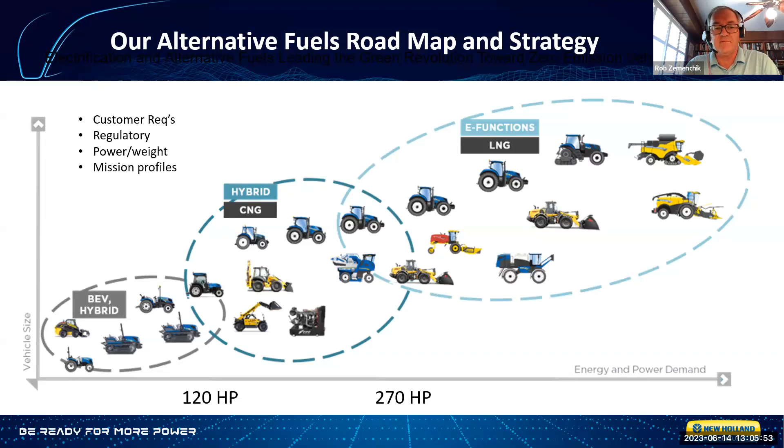With that background, we took a look at some of the different opportunities for energy out there. What you find is, all the way from diesel on the left, as you go across the different sizes and groups of available solutions, they seem to get bigger and bigger and take up more space. On the far end, batteries for a high horsepower vehicle begin to exceed the dimensions of the tractors themselves, or would overly dominate them, to where it becomes impractical from a visibility, safety, or other standpoint.

So ethanol and methane solutions kind of reside in the middle and give us an opportunity to deliver an energy source on board the vehicle without overwhelming the design and function and use of the vehicle from an operator standpoint. Okay, so there you see the methane that we're talking about today. And then you have hydrogen, and we looked at that concept previously. We had a hydrogen concept tractor as early as 2011, but it's so big and cumbersome for the profile that we want to fit with the tractor in question today, and then the battery piece.

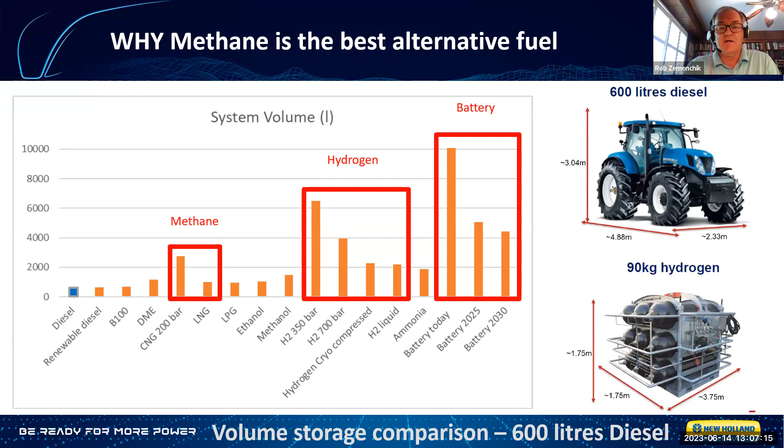Okay, so just to fast forward a little bit and a glimpse as to what we're going to be talking about today, we've introduced the T6 methane compressed natural gas tractor, primarily in Europe first. This tractor is about 180 horsepower, and you see a few tanks and other features that are added to the tractor to contain the methane, and I'll show you schematic diagrams of that later in the deck.

And then we have the T7, which is our LNG tractor. Now, in the past, we would create a concept tractor and talk about it publicly, but I'm excited to say we've gone beyond that already now. We have triple-digit volumes of the T6 tractor now in customers' hands on farms in production. They can buy one from their dealer and go ahead and take that home and use it just like a normal tractor. So we're in the production phase now of this.

We have been shipping these tractors since last year, and they're connected. We get the data from them. We see them on the telematics and can monitor the CAN parameters just like a normal tractor. And then the LNG tractor, though, we're still in the, you might say, late concept phase. So we've got some out on trial at the farms, and we're nearing the time when we would make those commercially available. So the T6 is ready to go and up and out there. T7 on deck.

Let's see here. All right, and then just as a glimpse on related products, we have the fully electric vehicles. Now they're a little smaller for the reasons I stated. You don't engage the ground as much with these type of tractors. They're more orchard, vineyard, or specialty applications, mowing, other light loader work. And so we showed this at Las Vegas earlier this year, and it is a tractor that we have planned to commercially release soon as well, but it is fully electric down in that lower horsepower segment.

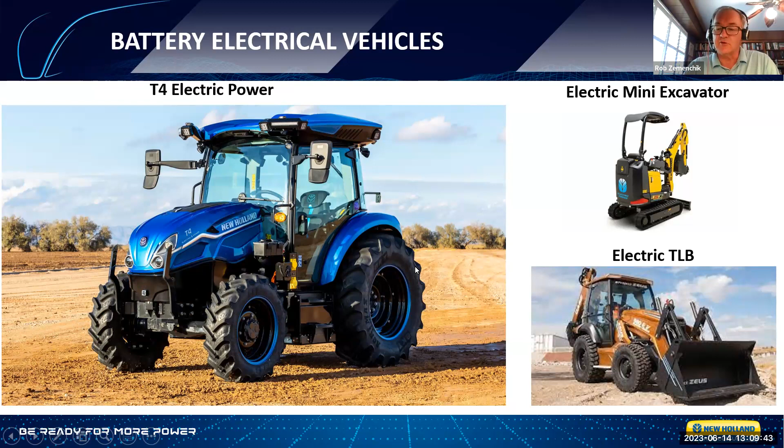And on the construction side, this is also early days of what we're introducing from fully battery powered electric vehicles with CE in mind. So just to round out the alternative propulsion look and feel from the New Holland brand.

You see the rationales then for why we would want to do these kinds of things. We want to reduce our carbon footprint. This plays into the SBTI decarbonization efforts that you may have heard a lot about. So this fits partially into scope 3, our use of sold goods, as well as an avoided emissions category, which is a little bit beyond scope 3, but is now being formalized to where companies would get the decarbonization credit outside of SBTI, but within the avoided emissions category.

So the methane tractor does a bit of both. It will actually generate less emissions, which is scope 3, and then from the ability to capture and contain the fugitive methane at the slurry, you could start to generate some avoided emissions credits as well. So for those in the sustainability camp, this is a little bit how we perceive it. And then, of course, the improved air quality measures, which I will detail here momentarily.

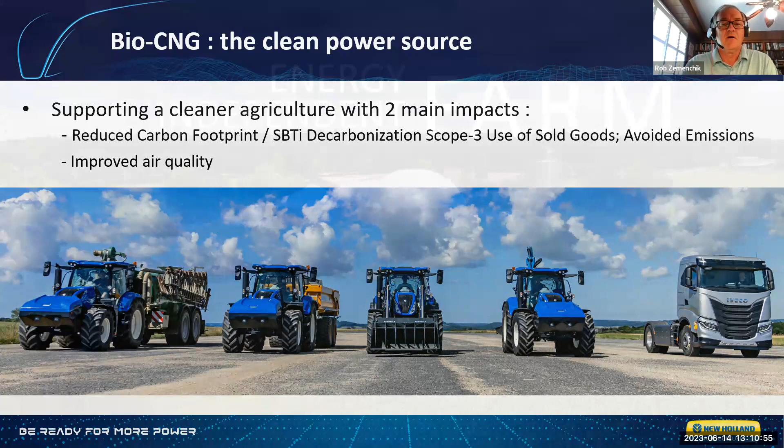Okay, let's look at an energy independent on-farm experience, if you will, and some of the KPIs and metrics that we've learned as we've deployed these tractors. All right, so a flow chart of the schematics involved sort of tell us that you can take all of these organic inputs, mainly manure, but it could be crop waste, food waste, any organic source can be pooled into this digester represented by the blue disc there in the middle. And it's anaerobically digested, okay?

And the flows coming out are quite interesting. There's opportunity for energy cogeneration. And then as the methane is contained, you have to upgrade it or filter it, if you will. The raw gas is about 60% methane, but there's a lot of hydrogen sulfide and water vapor and other things you have to take out before you have automotive grade methane that can be burned in an ICE or internal combustion engine. And so that's what the process requires.

After you upgrade and filter the gas, you have to compress it down to have enough range inside the tractor to make it practical. You can't run out of fuel in 20 minutes - a farmer would not accept that when he can go a whole day on a tank of diesel fuel. So we have to think about first upgrading it and then compressing it.

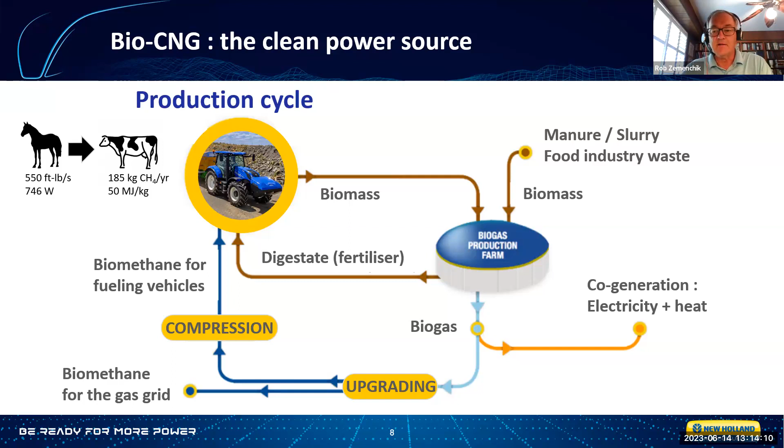About 80 times more potent even than CO2. So this is a double win - we get to take a waste product that is harmful for the environment and turn it into an energy source.

Bennamann is a partner that's helping us get there from here. They're a UK-based company, a startup with about 40 employees. Long story short, they wanted to solve the problem of the barriers to entry into this, and so they've developed a lagoon system that's affordable and practical and scalable. We have taken an investment position in them to help them along the way.

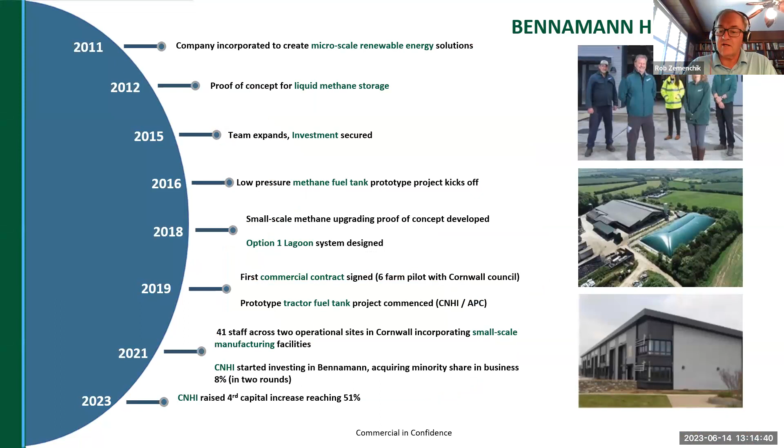It accounts for a huge portion of the gases that agriculture generates that contribute to global climate change. Some estimates are in excess of 30%. So we need to solve this problem if we're going to continue to use the confinement systems and energy-rich production systems we've grown accustomed to. Time is of the essence - the 2030 deadline was put on and agreed to by many countries in the Paris Climate Accord. So we're working under that paradigm to solve this problem sooner than later.

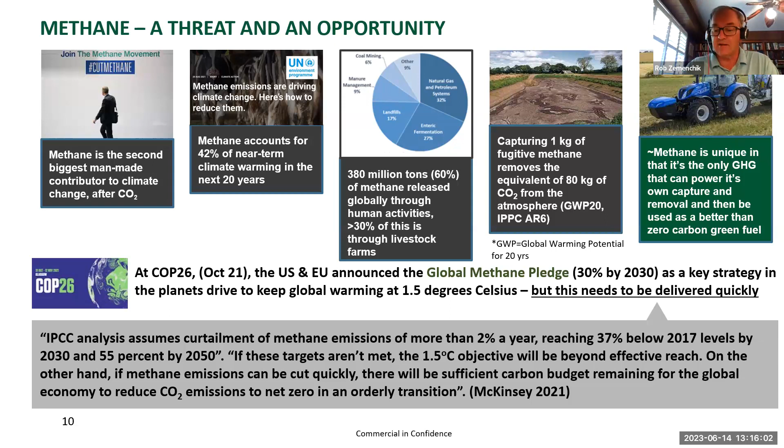It can be rapidly refined and liquefied. What we have seen is about every 5 days or so, the raw methane capacity of the system is full, then we convert it and generate the automotive grade methane.

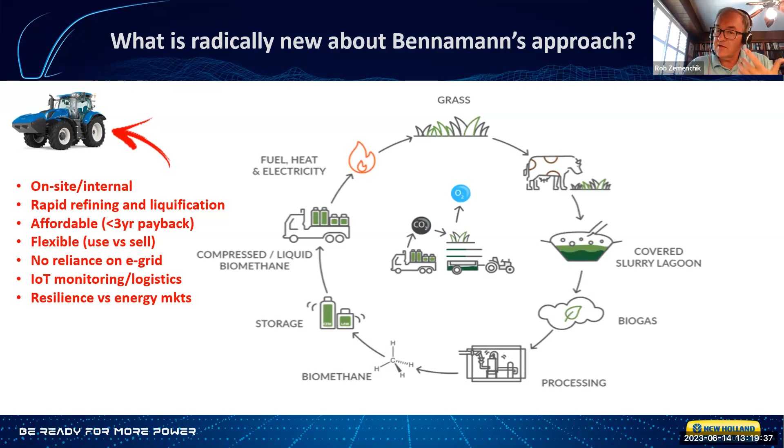You don't have to be on the grid and draw power from Commonwealth Edison or anybody else to make it work. This is another benefit of this circular system, not being dependent on the grid. You can hook it all up and monitor it 24/7, 365 with typical apps and connectivity. This helps the farmer and even the local community be resilient to extreme fluctuations in energy prices, which we saw in the last two years, particularly in Europe and Eastern Europe due to the conflict in Ukraine. So there's a lot of pluses here to take a hard look at this.

Okay, so here's what they do. You have a lagoon, usually 10 meters square or 5 meters square, something along that order. A plastic tarp is put over it, and this collects the dirty biogas as it's anaerobically emitted from the slurry, captured in the first layer.

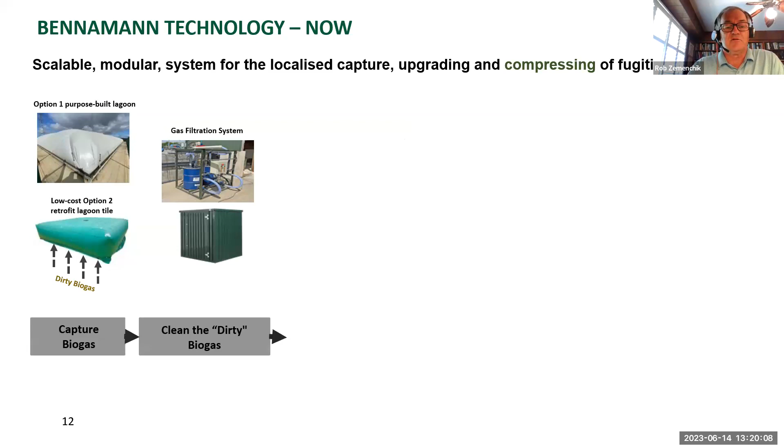Then there is this gas filtration system on the side, where you take out the impurities I mentioned, the so-called dirty biogas. Then it is stored in an upper layer of the same canopy. This green tent is sort of two layers: first layer is dirty, second layer is a storage tank, a fabric tank, where the clean gas is stored. It's like a sandwich you're building, dirty, then clean.

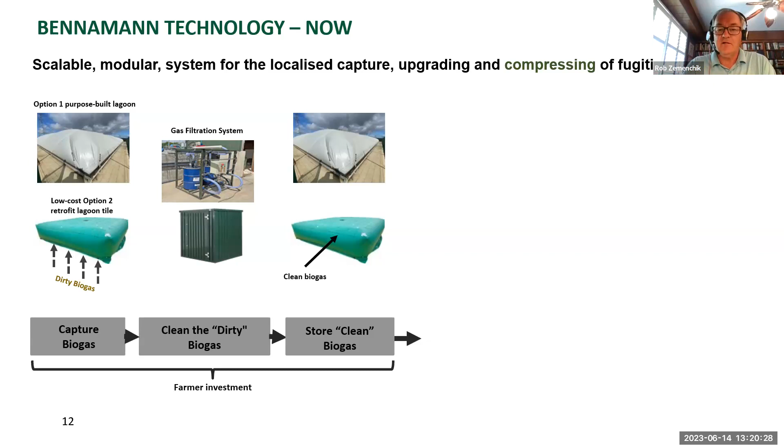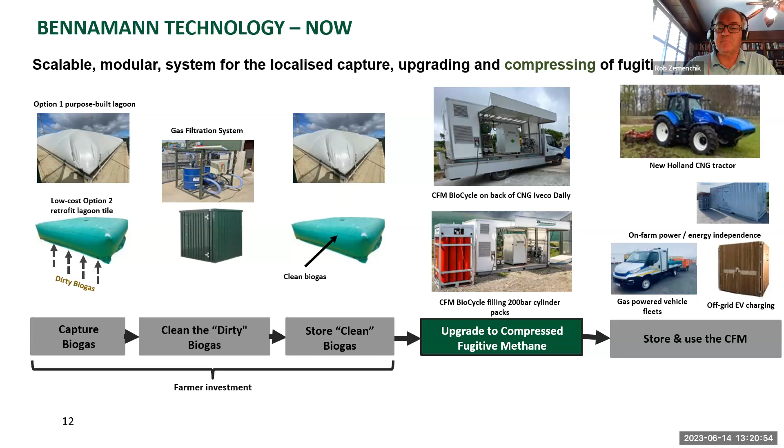Then you have this opportunity to build these packs for export. As I mentioned, trucks can come and get this purified automotive grade methane that formerly was just lost to the environment and now can be contained and commercially made available, helping build out infrastructure and the broader use of the fuel source.

So here's what it kind of looks like a little bit closer up. You see the canopy. It has a 20-year life, so it's not forever, but well beyond the payback period of approximately 3 years that I mentioned previously. It's a two-piece solution. They even found they get rainwater benefits from it in collection because it acts like a watershed.

It basically zips together, and it's pretty easy to install. It takes a few people to put it together, and it's easy to retract for getting the solids out for fertilizer replacement value. And it's easy to replace if damaged.

So they've built this rather low cost solution that seems to reduce those barriers to entry. You don't need these massive bolt-together towers that we're used to seeing in the past in our silage systems. This is now a little bit more of the bagged agriculture approach, if you will.

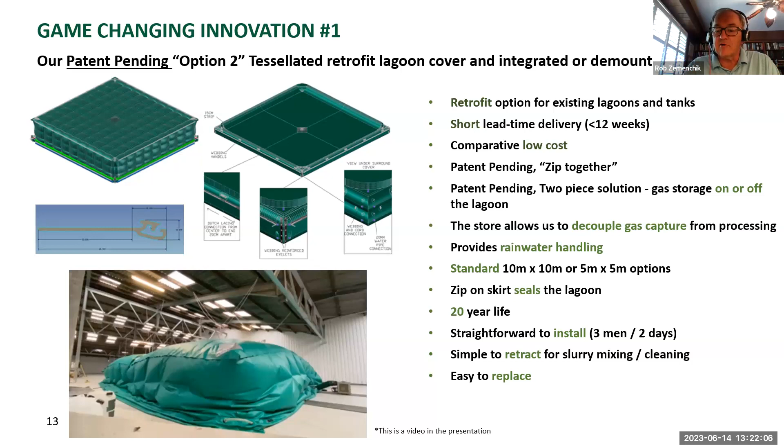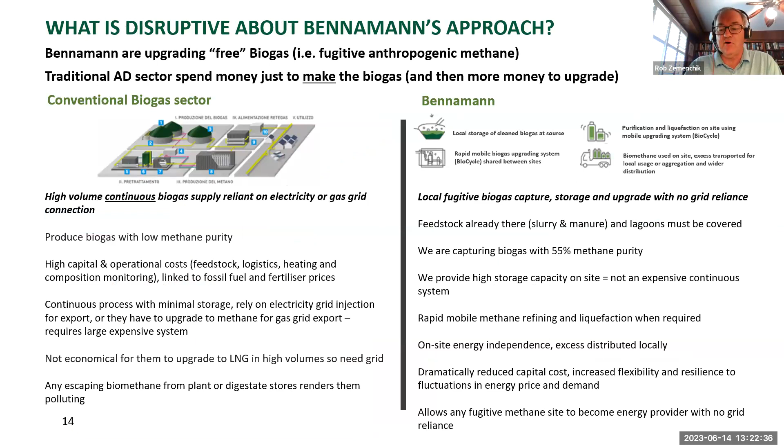We won't read through all of this, but on the left you have the limits of the conventional systems. Some have to do with getting the purification and being dependent on the grid and so forth. What the folks at Bennamann have developed is this ability to purify on site, without being on the grid, and to have it truckable and usable even beyond the farm gate.

Okay, and the farmers, what's in their mind as they contemplate using a system like this? As we consider it, the regulatory landscape is getting more cumbersome. Let's be honest, the days of just throwing the manure out on the landscape at 10 tons to the acre are probably numbered, both from a phosphorus and nitrogen runoff standpoint and accelerated eutrophication. Those were all the things we used to talk about, but even from an emissions and carbon capture, decarbonization standpoint, this is no doubt going to meet with increasing regulatory limits and challenges worldwide.

And we are already seeing this in the UK, and it's picking up momentum elsewhere. I don't mean to sound alarmist, but I think if we're honest, that's probably the trend we're seeing. The increasing costs of compliance to meet that regulatory landscape are certainly real, and farmers, even in their purchase considerations going forward, are having to factor that in more and more as to how are we going to handle this. What are we going to do?

Whether it's pork, poultry, or dairy, I'm not exclusively focusing on cattle today. This has applications to other animal systems as well.

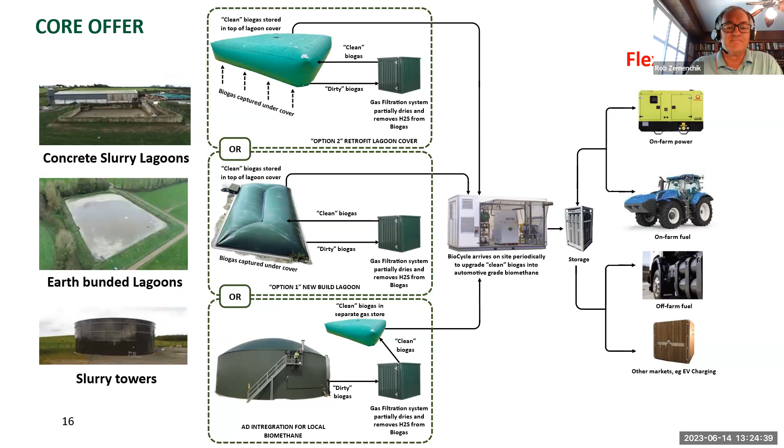Okay, and what are some of the benefits that can be realized? There's a list of them here. The payback mentioned is 4 to 6 years. We're a little more optimistic, but depending on the market, let's be conservative. Some areas will qualify for subsidies, some won't. It's not totally dependent on that, but that may be a factor.

There's certainly the environmental benefits. I like the fact that the digestate left over from this process can be used to supplement phosphorus and potash inputs. We've tried to capture the bulk of the nitrogen, of course, but that can be a fertilizer source that can replace a lot of the synthetic fertilizer, and that has a benefit too because of the nitrous oxide and denitrification losses often associated with that, plus odor and air quality factors associated with raw manure disposal and broadcast using box spreaders or side slingers. So there's environmental benefits that are tremendous here.

And the energy independence piece, not being subject to the vagaries of the markets when it comes to gas pricing, that's a benefit as well for both farms and for the public.

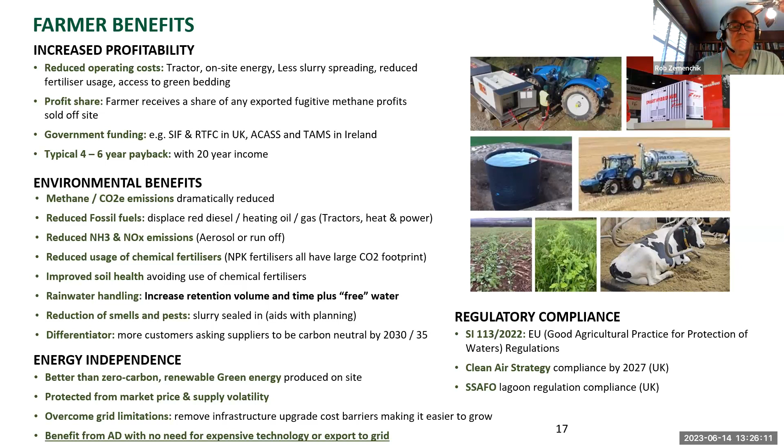Okay, so in our on-farm trials, what have we learned? We have some KPIs, and we've called out some of the key ones in red in the upper right. So we take this source from the cows, this raw methane, if you will, and we have found we can capture and convert at about an 89% efficiency.

The raw methane into that 185 kilograms per year per cow that I mentioned. If you look at a 120 cow herd, that's approximately 20 metric tons of methane per year. That would power approximately two T6 180 horsepower tractors for about 700 to 800 hours each, depending on how they're used. So that's 120 cows - if you had 1,200 cows, you're now talking 20 tractors, and you can do the scaling math there, or it can be sold off, as I mentioned.

And the 545 is the tons per year that's avoided by such a herd. Very interesting - we can look at this, and this is 11,000 tons over a 20-year period. You start to look at this in terms of your SBTI objectives and your avoided emissions goals. I've started to do this, and the methane captured, saved, and converted is significant against all the diesel emissions you have to consider. So this is not just noise - this is a meaningful stack on the bar chart.

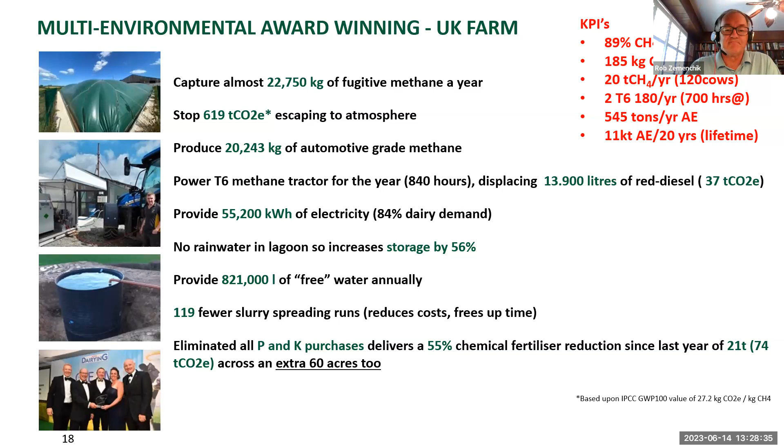Okay, in terms of investment, the farmer certainly has some CapEx considerations to make this successful. We've got to put in a lagoon if there isn't one already. We have to build an infrastructure that allows us to pack and bottle these if that's a route that's going to be taken - a filling station to charge the tractor, I'll show you some pictures of that momentarily - and a generation system, if that's required, and certainly it will be, because I mentioned you have to take a little bit of the methane to create enough power to run the compressors and so forth.

Bennamann itself comes to the table, and they have what they refer to as a biocycle. This is a truck service that can gather the bottles, if that's the way the business model is set up, and take those packs to other users of methane.

And then the generators as well, they participate in that. You need a dealer network to service and support this, so we have to train our dealers. How are you going to support a methane tractor and service that, and a methane power generation system, and contractors who will be willing to fill that need? So there are those technical requirements as well, and then franchisees that may indeed look at providing delivery services and equipment maintenance contracts.

Okay, so it's up and running. It seems to work. The parties involved are benefiting from this, and so commercial viability, I would say, is encouraging from what we've seen so far.

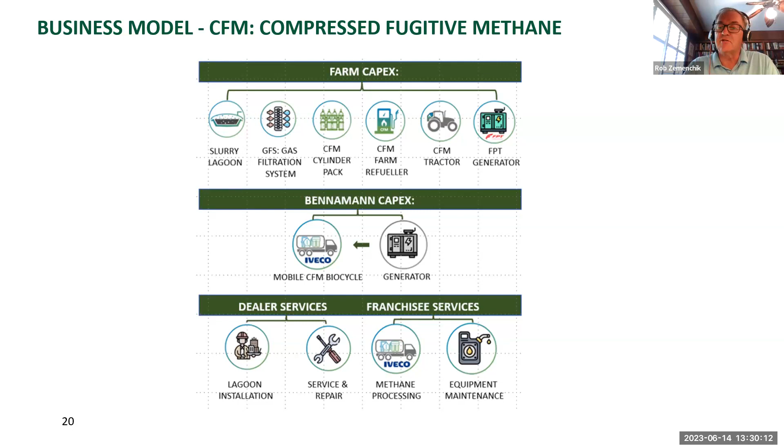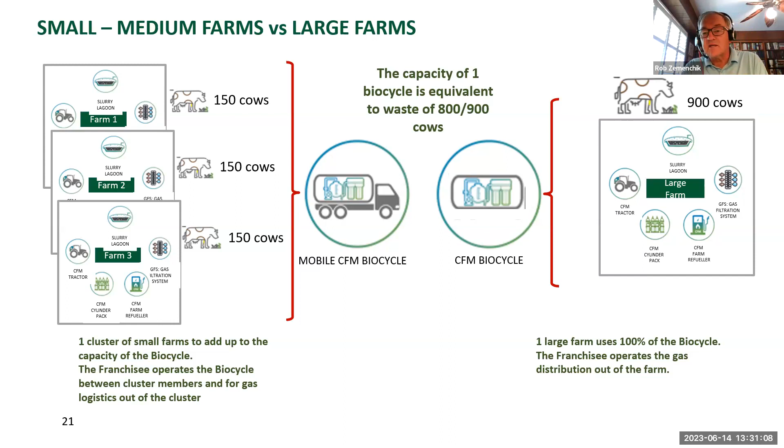Now, not everybody has 150 cows. You might have a community with several farms that big, so they can be grouped together. Either the manure can be hauled, or if the lagoons are still separate on each of those farms, this truck service could make a route and service them, much like a dairy truck used to go around in the old days. Now a methane truck could take its place, and the fugitive methane then gathered and sold at scale and used. What we found is one of these contractors with a service truck usually ends up servicing about 900 cows or so by the time he makes his routes and rounds and handles all the packaging and bottling. So it can pull together several farms so that they can get the economies of scale seen by bigger operations.

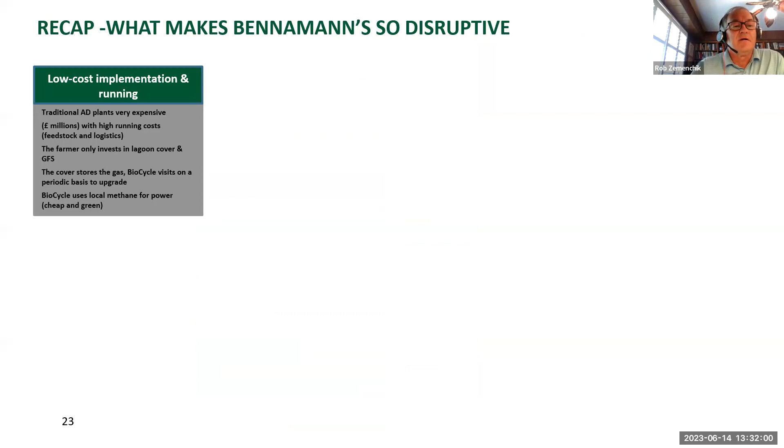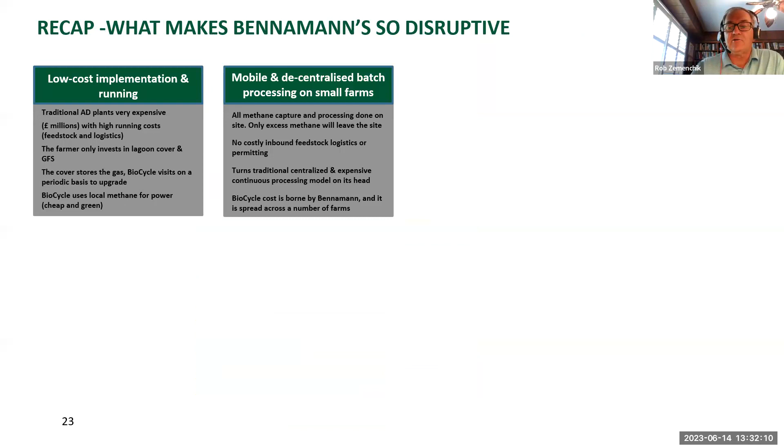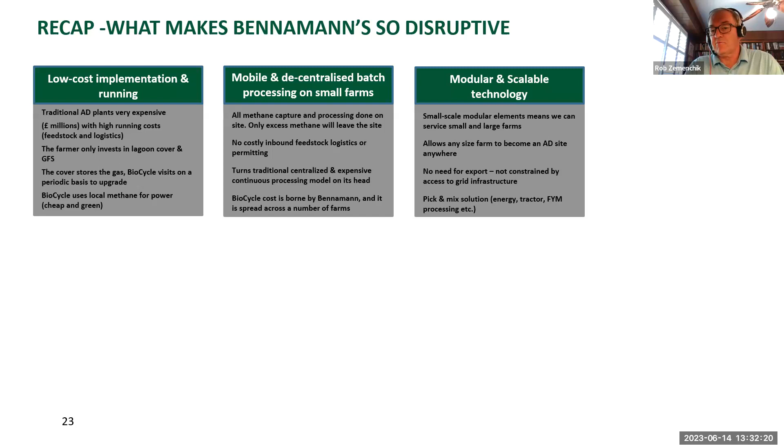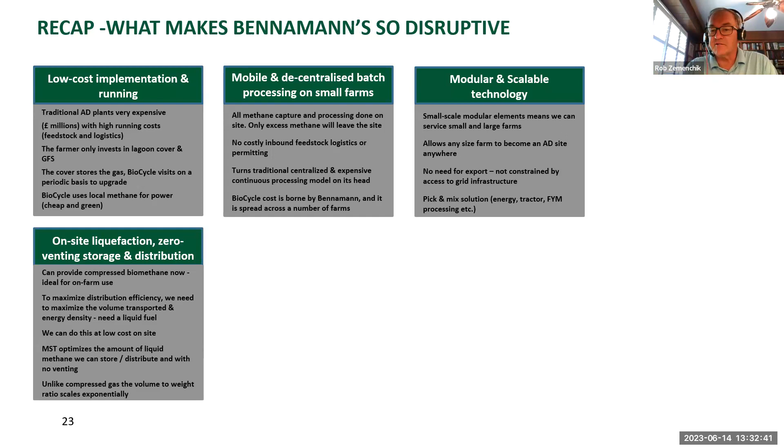Okay, so what are some of the summary points to be made? We have a low cost implementation and running program versus traditional approaches to the problem. We have a decentralized way to manage and gather the methane once it's purified, generated, and sourced. We also have a scalable technology that works for both smaller farms and bigger farms. There's no need to export it, you're not dependent on the grid. You can use it internally within the operation or opt to sell it, as I mentioned. It has on-site liquefaction, so we actually produce the product right next to the slurry pit. We don't have to send it off to Cushing, Oklahoma, or anywhere else to get this job done. It's on farm, which is a positive for most growers. It's zero waste, so it's truly circular. We're not using a food source to create energy, as ethanol often does. About 32% of the US corn crop goes down the throats of tanks of cars, and I've often wondered how long that can go. It has its issues, especially in an inflationary environment, so this is another consideration. And it's truly a circular economy from what was a waste product and also one that had an environmental problem. And we have end-to-end service delivery capabilities and contractors that appear to be willing to step up and participate in this solution.

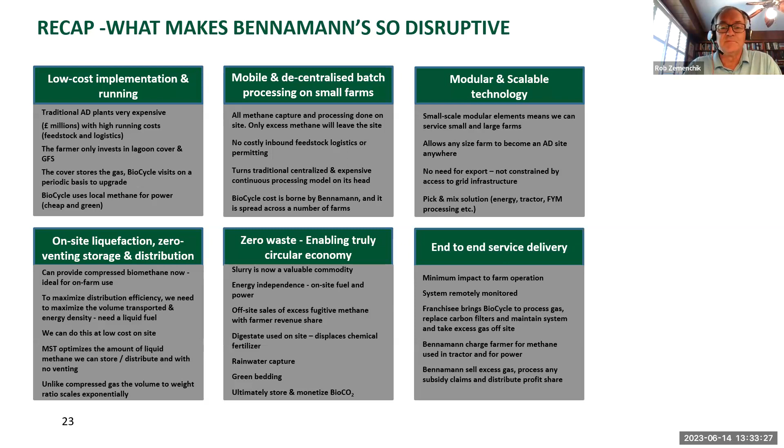Okay, so it's simple because we didn't need a whole new form factor. We're using an existing T6 tractor — same axles, same cab, same tires, same transmissions. This was an easy conversion for us, and so we didn't have to go through a lot of radical training for operators. It's pretty simple for them to plug in and fill their methane tanks and just treat the tractor like normal. So that's a benefit as well from an OEM's consideration and standpoint.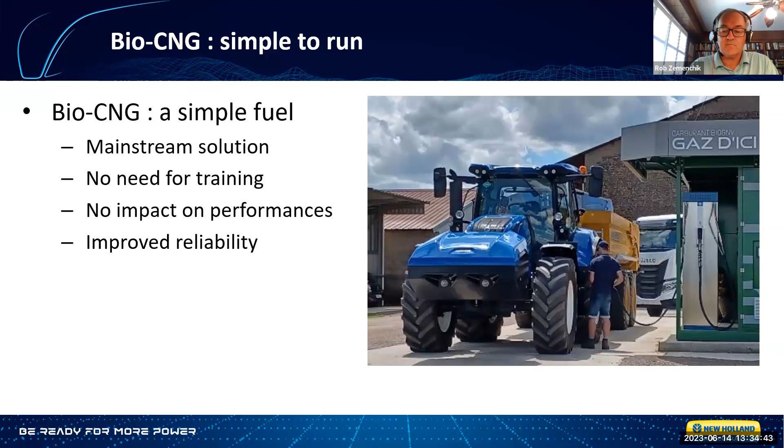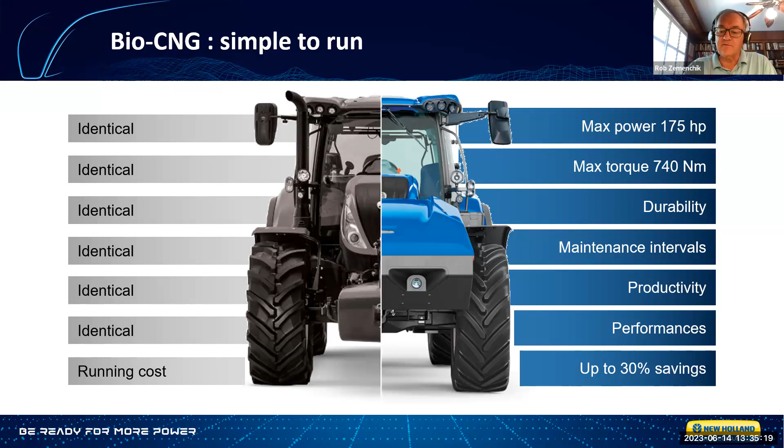It's a simpler system. Here you see on the left the traditional tractor factors, and on the right hand side the comparisons.

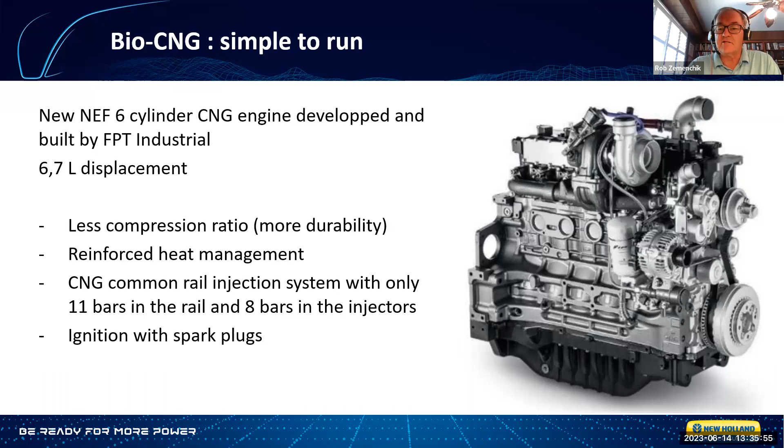Our engine suppliers have taken a hard look at what they need to do to combust the methane, and they didn't need to make a lot of radical changes to the engine. It's a common rail injection system. Yes, there's pressures involved and maybe some slight differences in bars or kilopascals of pressure, but it's still an ICE engine. So it wasn't a difficult transition from where we were to what we have today.

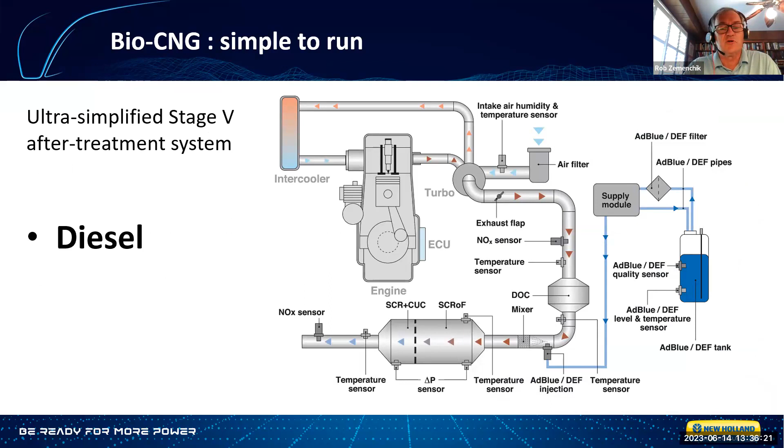Here you see the traditional look at a diesel setup, whether we're using DEF or diesel particulate filters or other things that help us be Tier 4B or Tier 5 compliant. It's a little complicated in the routing and tools that make this system work. I'm going to show you a comparison of this diesel system versus the methane system.

Pretty straightforward, we don't need diesel particulate filters because there is none. That's a savings farmers like, those filters are several thousands of dollars. So there's some benefits to this system in its simplicity.

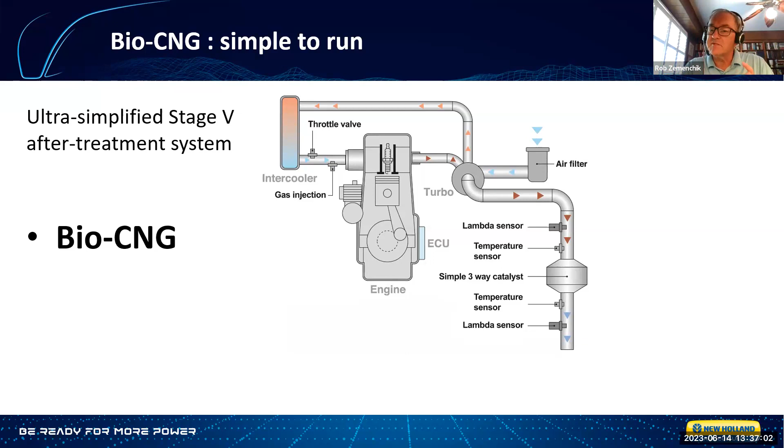So they like it, and it meets Stage 5 compliance, so it's future-proofed a little bit. We're encouraged that way too, that this isn't here today, gone tomorrow. It's going to stick in the solution and allows us a long ramp-up period for helping growers get to where they need to be in terms of compliance. So we don't have an obsolescence risk here, and that's compelling.

You can fill this gas up pretty much anywhere there's a methane filling station, as this adoption of methane gets more widespread. When you see the word autonomy, that doesn't mean driverless, that means independent or standalone, that the product can work and get the job done without a high dependence on other things happening.

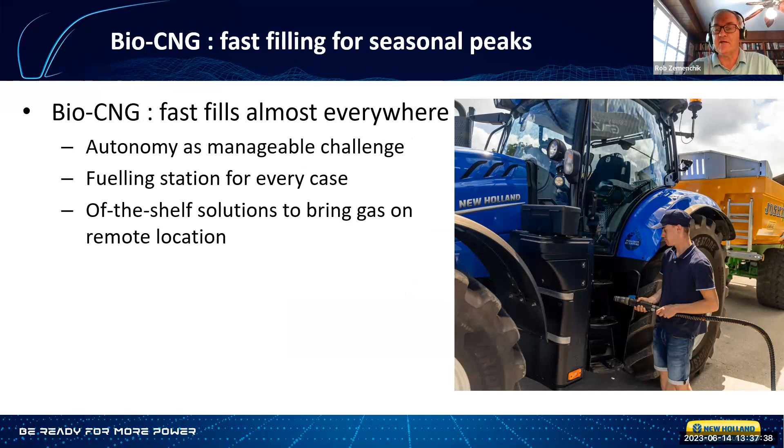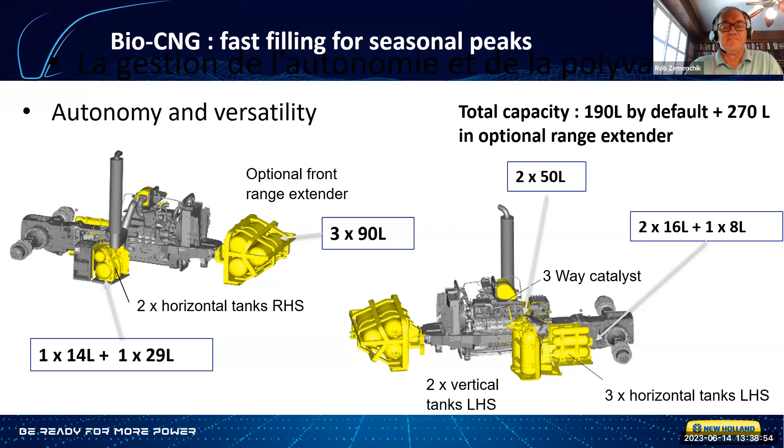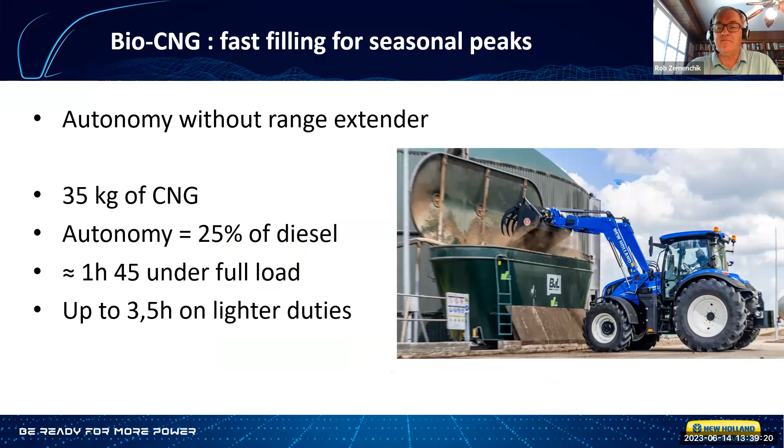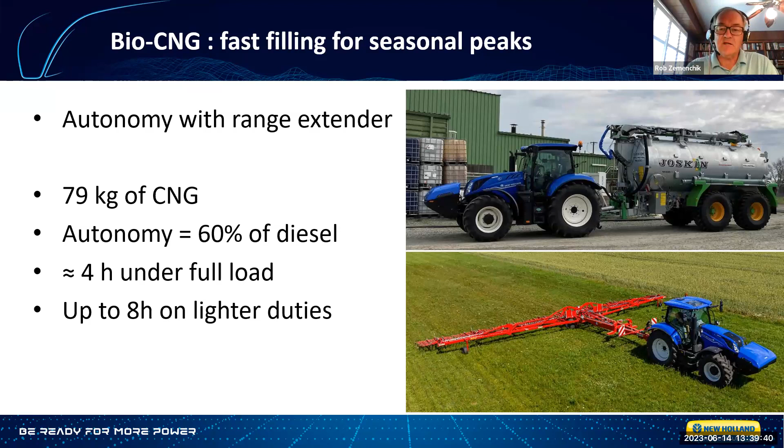Without the range extender, just doing traditional farm work, loader work, we get about 1 hour 45 minutes, almost 2 hours, but that's heavy duty. If I were doing light duty work, maybe 3.5 hours with this tractor. So it depends on the mission profile and duty cycle, somewhere between 1:45 and 3.5 hours without the extender. Adding the extender, we can go 4 hours or more with full load, like tillage or something ground engaging, and up to 8 hours on lighter applications, maybe spraying. So from that standpoint, this seems to be viable.

As public station build-out occurs, tractors or any other vehicle, a school bus, a roadside mower, or anything, could begin to participate at these filling stations, whether at the farm a farmer may create this, or anywhere else. So delivery systems seem rather simple, they're not elaborate to make this happen.

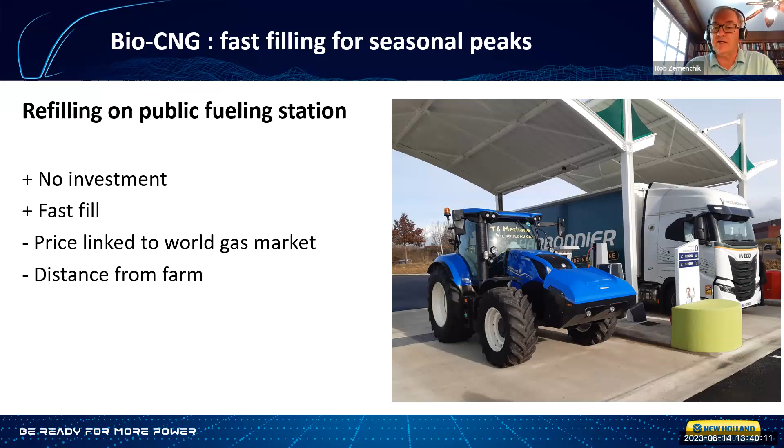And just nearing the end here, you can create these bottle type systems where on the farm, the canisters could be filled, stored, and just like when you go to Home Depot or Lowe's and pick up your propane bottles for your gas grill, you could do the same for methane and your vehicles—either delivered to you from a contractual point of view, similar to the cages you see at the big box stores. So this is another approach to how to benefit from the available fuel.

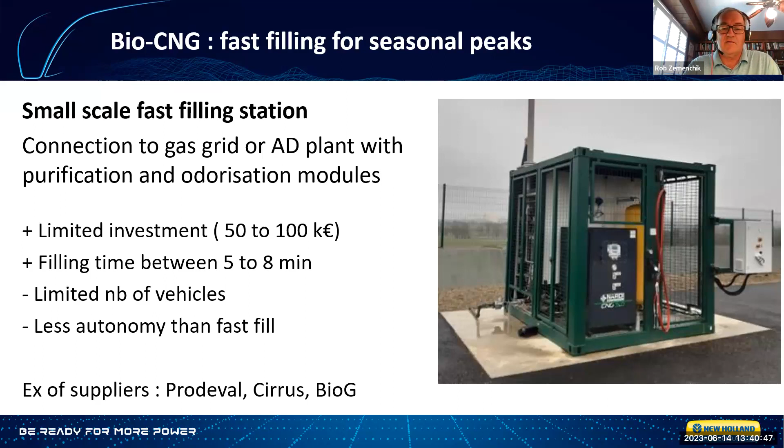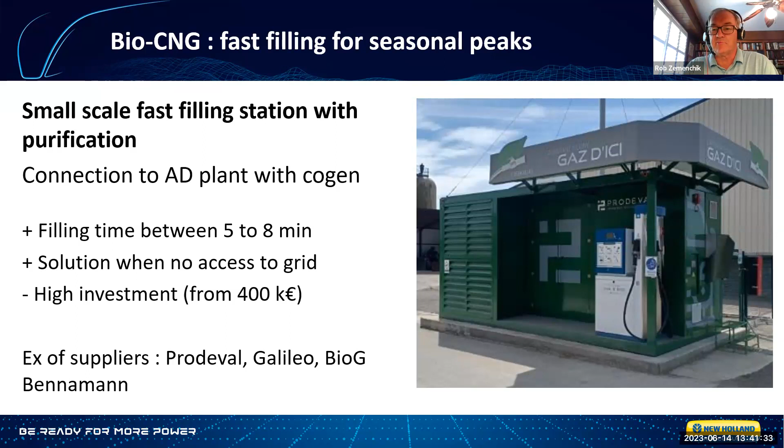These small scale filling stations can also be created, and you see some of the suppliers who've jumped in and started to create these—just like a traditional gas station, but now a methane one. In rural communities, this can be a big plus, and again, independent from the grid. So to put one of these in a community, I don't have to run three-phase power lines and 440 volt lines to create something like this. It can be on site, right there on the farm, which is nice. In my area, a power pole today with that kind of power would be $10,000 a pole, so think about that. This seems rather easy to facilitate.

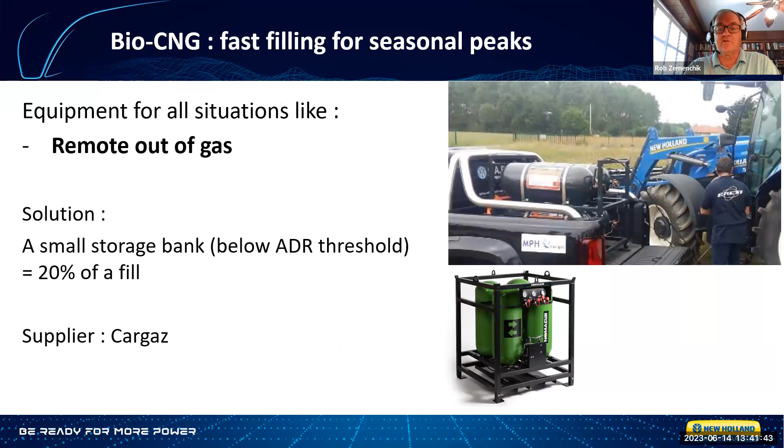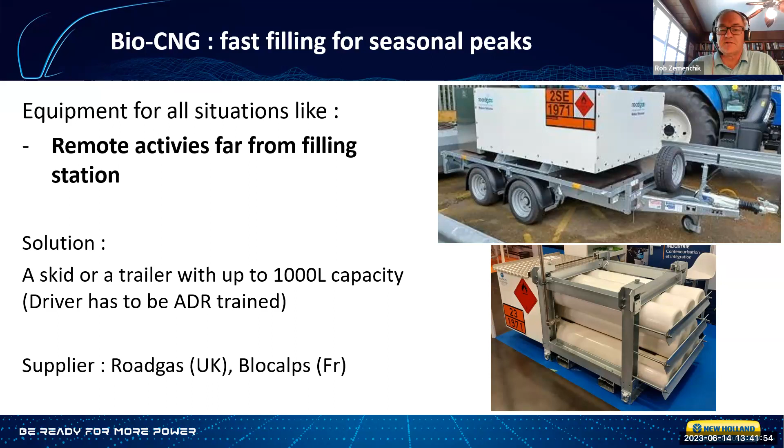Small packs for smaller trucks and light utility vehicles are certainly possible, and then you see some remote capabilities with trailers and other things. This can take all different shapes, forms, and sizes. And then finally, on a larger scale, if you were to deliver this to a factory or some other larger facility, it can certainly be done with larger tanks and larger vehicles.

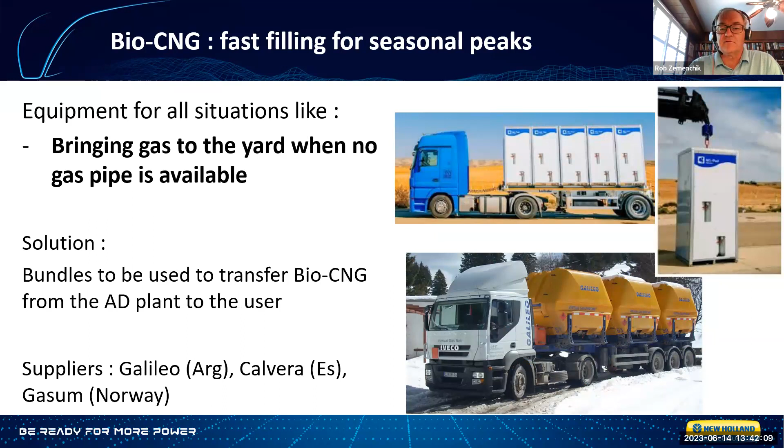So that's all I had today. I hope that wasn't too quick of a walk through the process, and I've oriented you to at least what we have found. I hope I can answer any questions that anyone might have.